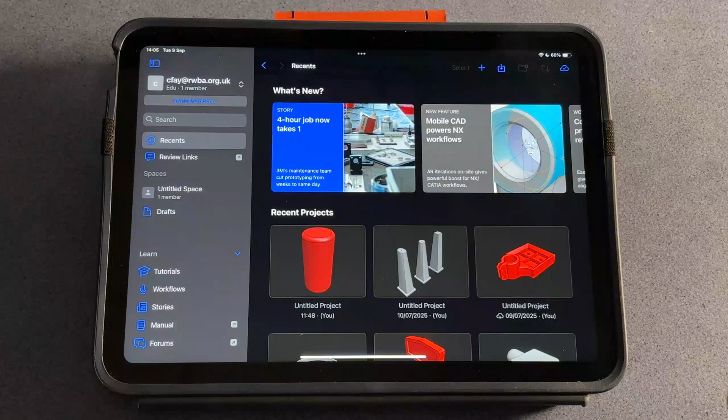As I've said in some of our previous videos, this isn't actually a beginner's course into Shapr3D. We really need you to look at the pizza cutter project or also the rubber stamp project, and that'll give you a good fundamental knowledge on how to use Shapr3D.

So speedily getting into it, we've opened up Shapr3D on our iPad, and I'm just going to hit a new file and it'll bring up a brand new workspace. I've got the OCR engineering drawing here, so I know all the measurements for all the correct parts, and I'm just going to basically start scribing that into the program.

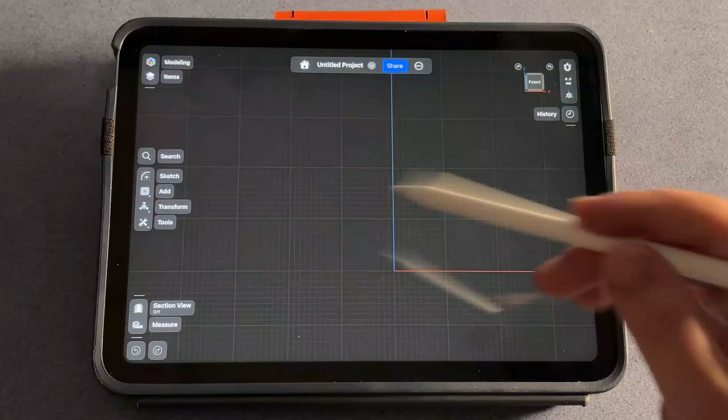Instead of looking down on the piece like I normally would from a bird's eye view, this time I'm actually going to do a side profile. So I'm going to go and select the front view, bring it down here. I'm going to start annotating the lines. I'm only going to be doing half the profile of this piece, so some of the measurements I'll be dividing by 2, but it'll all make sense when it's finally created.

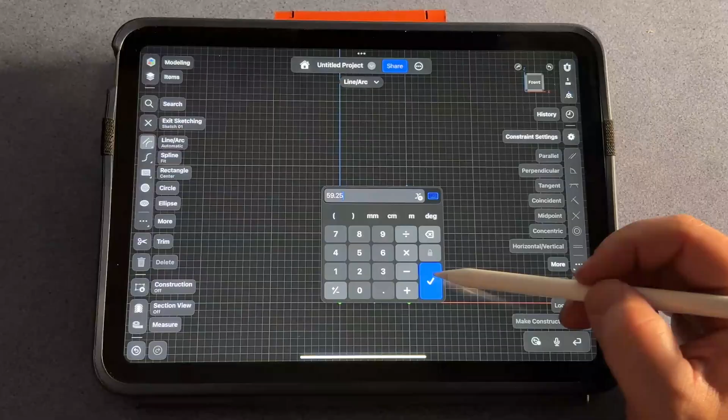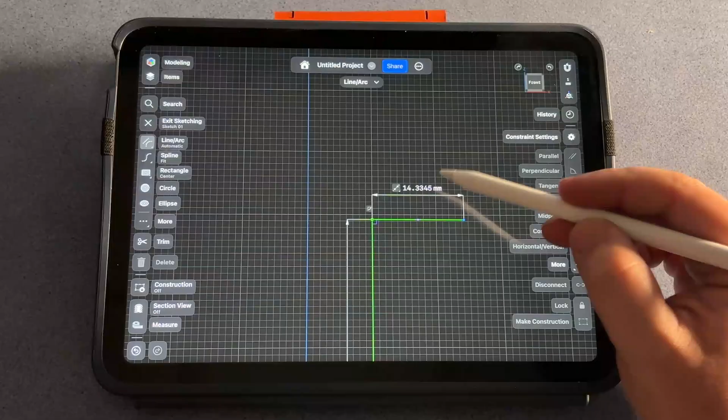So I'm going to hit sketch and my lines. So first of all, let's do the bottom 10 millimeters, so from the middle there, out, select that and 10. Okay, that line then would go up to 59.25, so 59.25, brilliant. Okay, next one, we need to come out, it'll work out to be 9 millimeters. So I'm just gonna type it in this way, that's it.

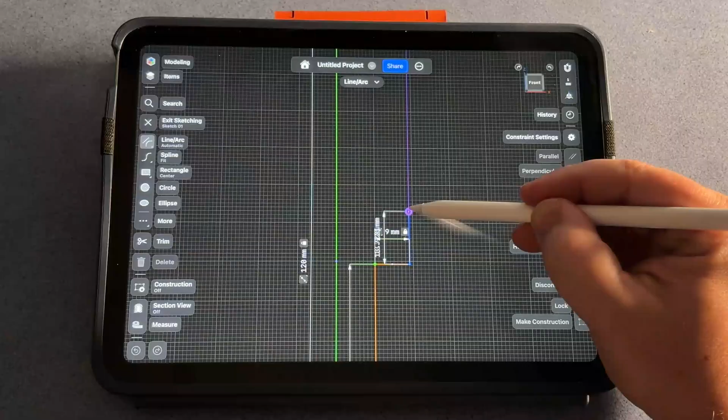And in total, the whole piece is 120 millimeters. So what I'm going to do for this one is I'm actually going to go back down to the start line and draw up a line, 120. And now I've actually got a line there, which is the length of the piece. There's 2 more little lines to put in. One is a 20 mil line in this direction here, 20 mil. And then I join those 2 up.

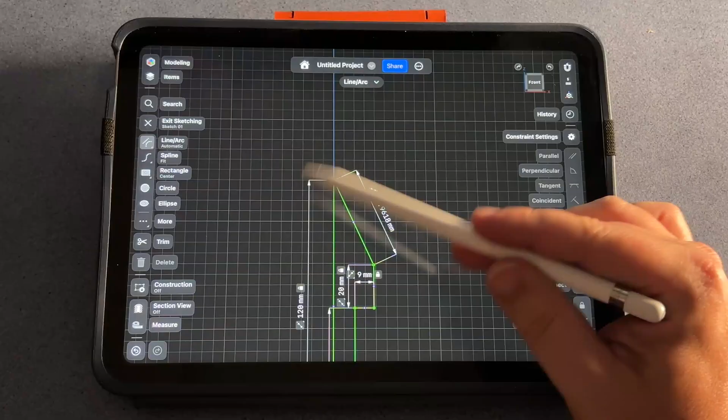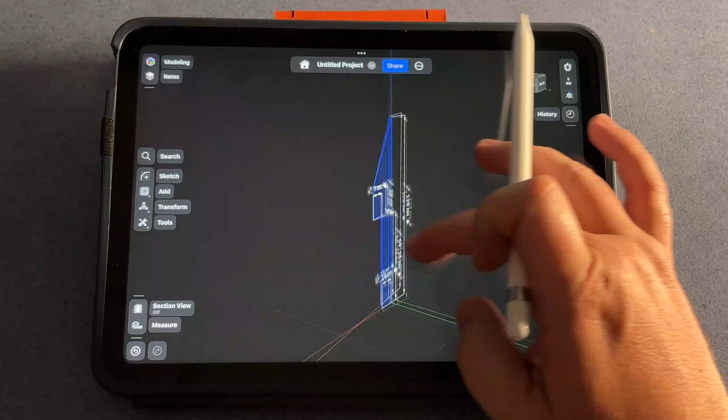And I should have an angle between those 2 lines of 25 degrees, because the full top radius would be 50 degrees. So if I click these 2 lines, it's saying it's almost like 1/1000th of a millimeter off. So I'm just going to put 25 in there, which I'm happy with. Exit sketching. And you should be able to see I've got a nice shape there, the side profile of half of our Plumb Bob.

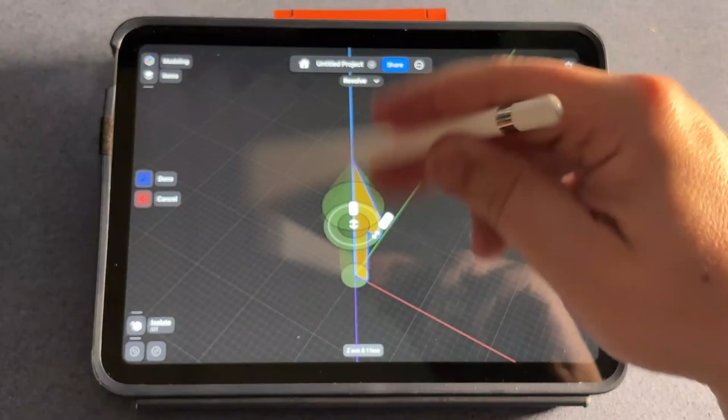So to actually create the 3D form of this Plumb Bob, I'm going to revolve that one surface 360 degrees on the vertical axis that we have here. So the way we do it, we would select the surface we've just made. We would find our option of revolve. And then select the shape and then select the axis. And what it's going to do is do a whole revolution of 360 degrees around that axis. If we hit done, you'll see it's now created that lovely 3D profile that we need.

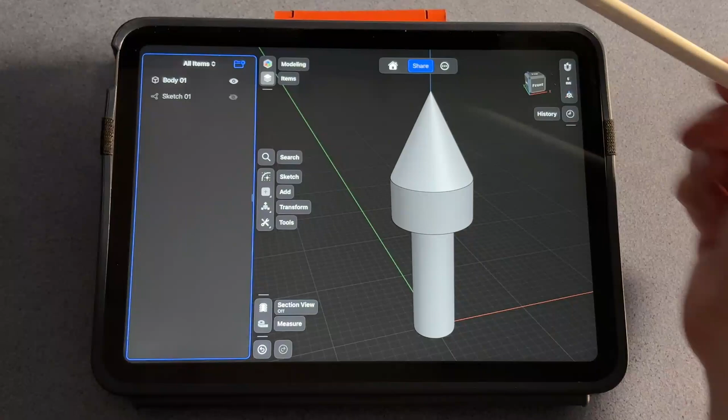I personally like to work a little bit cleaner in Shapr3D, so a lot of these measurements are associated with the drawing that you just did. So if you go to items and just hide the sketch that we did, it will hide all the details of those measurements and just show you that body that we've created.

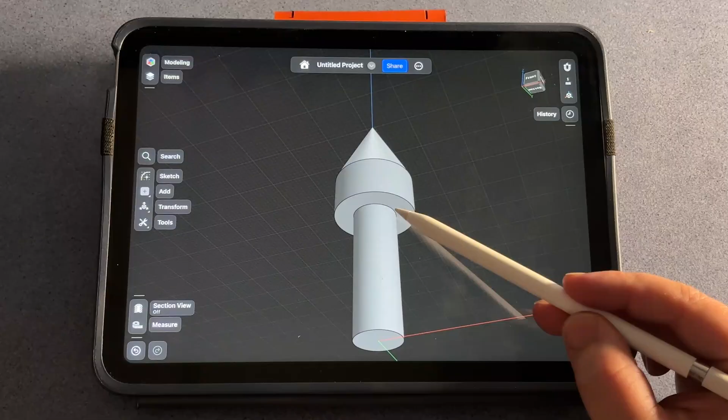There's just a couple more bits we need to add, and it's a little radius on this inside edge, a radius on this outside edge just here, and a radius on this bottom edge. So nice and easily, like we've done before in previous projects, select it, drag it out. It's saying it's a radius of 1 millimeter there, which is correct for that one.

I'm going to come up here, select the inside edge. That one's 2 millimeters, so 2 millimeters, perfect. And then it's the same with this outside edge just here, but I'm just going to make sure that's just selected, and 2, perfect, and deselect.

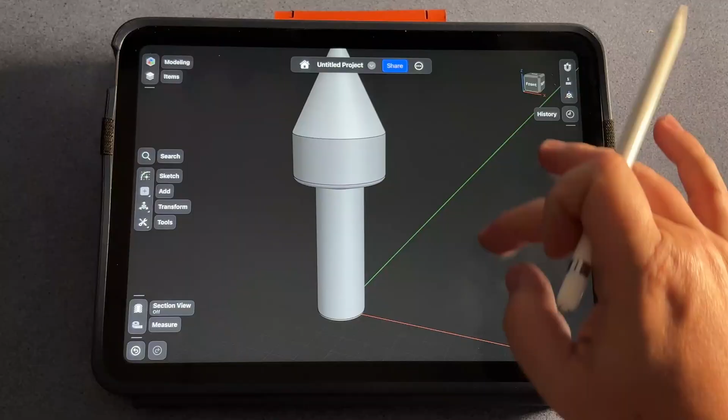Perfect, that's exactly what I needed for the outside form.

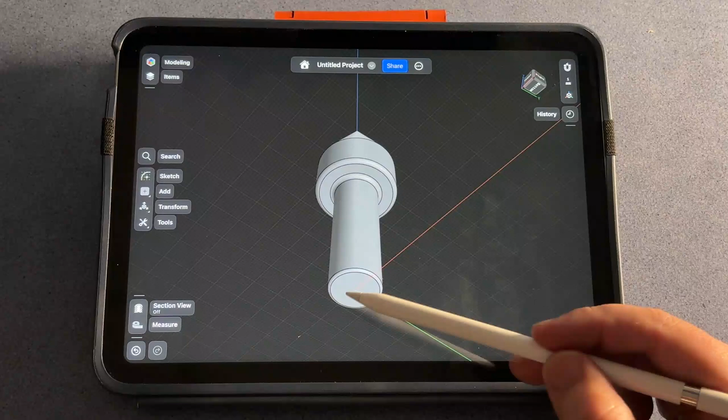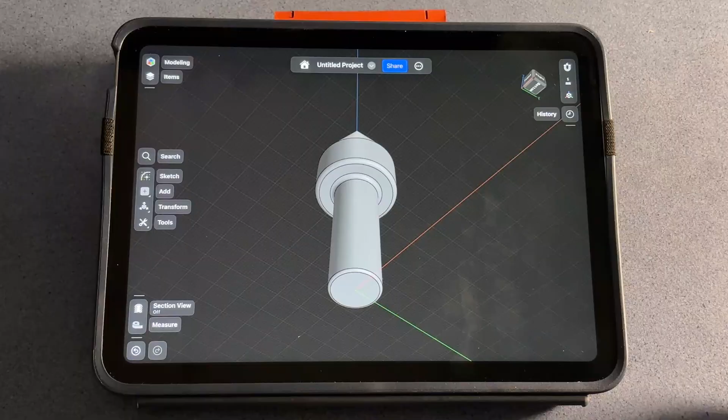So the next bit is actually one of the most difficult bits. In the end of this shaft, there is a metric 10mm threaded section which goes up into the piece for 20mm. With Shapr3D, there's not really an easy way of doing a threaded surface. You actually have to do this quite manually in quite granular detail. So I'm going to show you how to create the threaded section in this piece, and I'll try to explain as we go along some of the measurements, etc., and why we do it.

So as I've finished with this piece just for now, I'm just going to move it out of the way. I'm going to double click on the body and just drag it over to the side, keep it out of the way. I know I can hide it, but I'd rather just see it and it just be there. So I'm going to hit deselect.

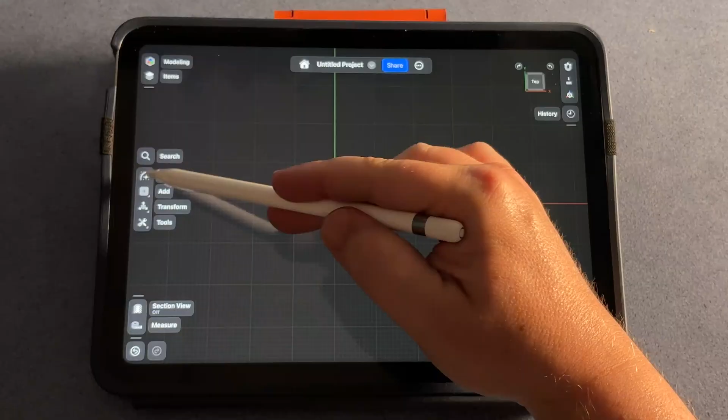We're going to start now drawing this threaded section. So the first bit, I'm going to go to the top view, and I basically want to do a circle, and I'm going to bring it over. I'm looking for an 8.8mm hole. Circle right there, and then I can extrude that.

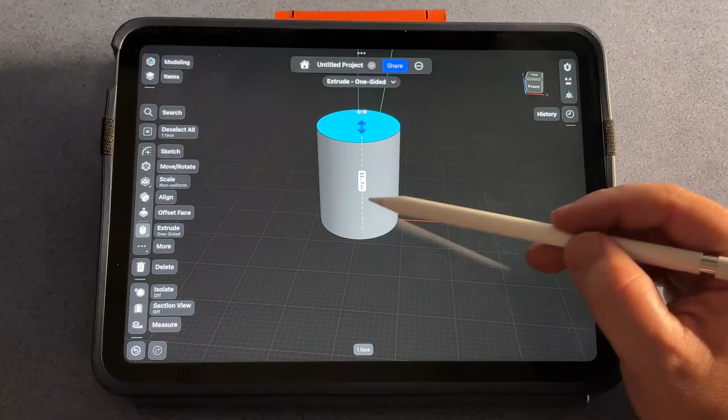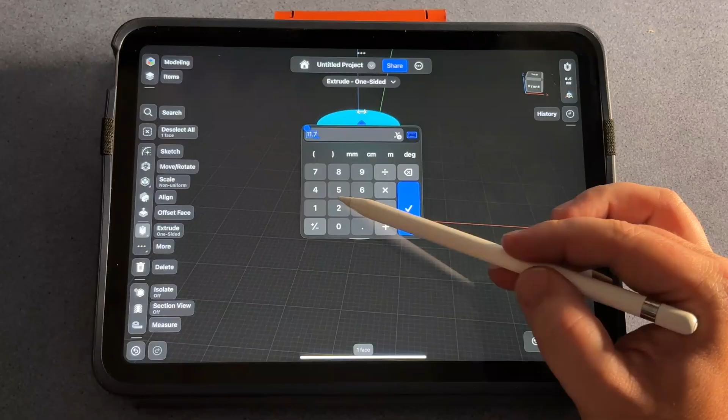The length of the hole that's going to be inside the piece is actually going to be 20mm, but I'm actually going to do 25 because we can trim the excess off in a minute, and I'll make sense of that in a little bit. So 25mm. And that's the length of the hole that we're going to create.

The next thing is we're going to create the thread, which is going to ride along the edge of this cylinder. We have to be quite specific with this because we're using a metric thread system. With an M10mm thread, we're looking at a pitch of 1.5mm, and that is basically one whole turn of the thread every 1.5mm. So I'm going to show you how to do that now.

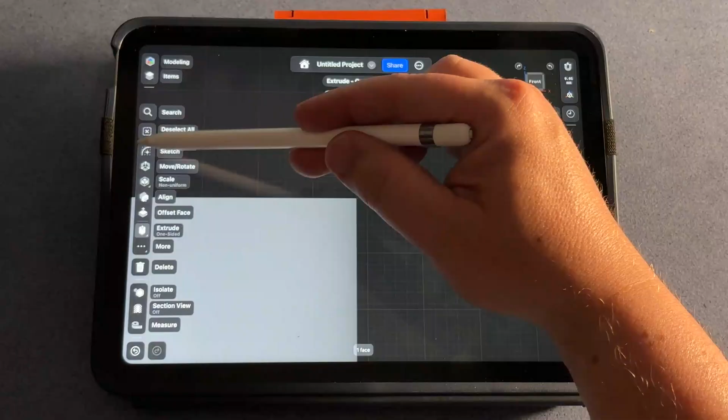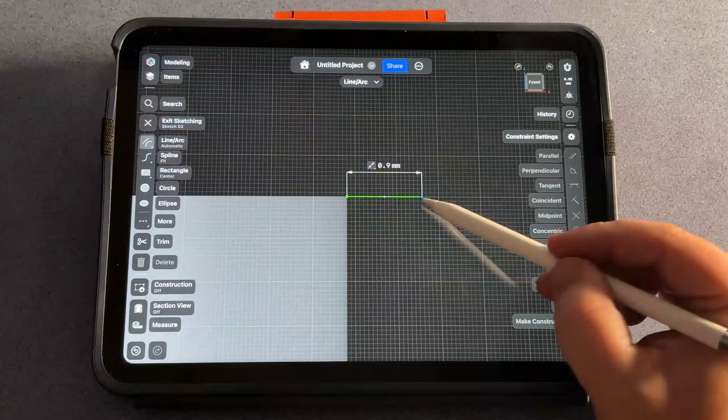So I'm going to go back to front mode, and I'm going to go to the top corner of our piece. I'm going to basically draw a triangle, which is going to be a profile of the thread. The best way of working this out is I know that I need to have a line that is going to be 0.9mm, because that's actually going to be the measurement of the thread. So 0.9, and then I'm going to draw two lines off of this to basically create the triangle of the thread, and I want that thread to actually be an exact measurement of 60 degrees between the two.

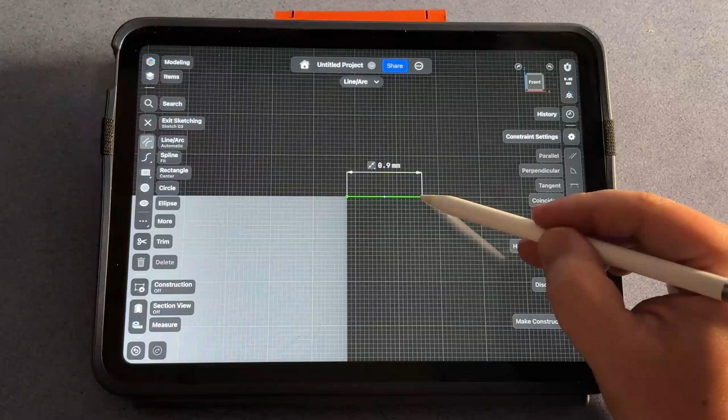So I'm going to draw a line first, draw it down, and then I'm going to select the two, and then I'm going to create half 60 is 30, I'm going to go 30, perfect. So I know this is this half, and then if I do a line over here, join it with that one, and the two measurements between there is going to be 30 as well.

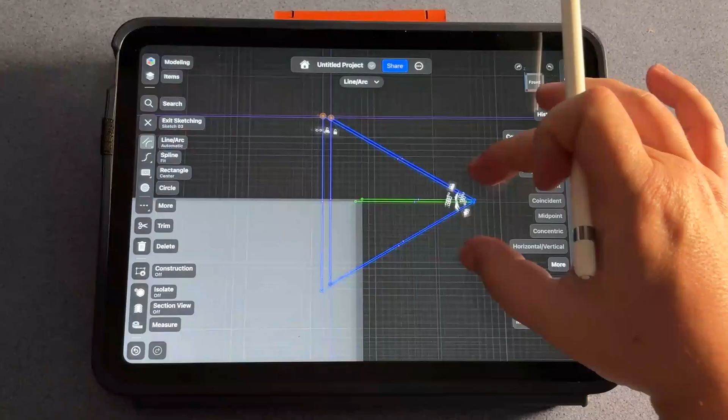All I really want is to make sure that those two lines are joined up as well, so I'm just going to do a line in between those two. Helps if I had them joined, there we go. And that is the profile of the threaded section. I'm going to show you by using the revolve option again - we're going to make a thread all the way around here.

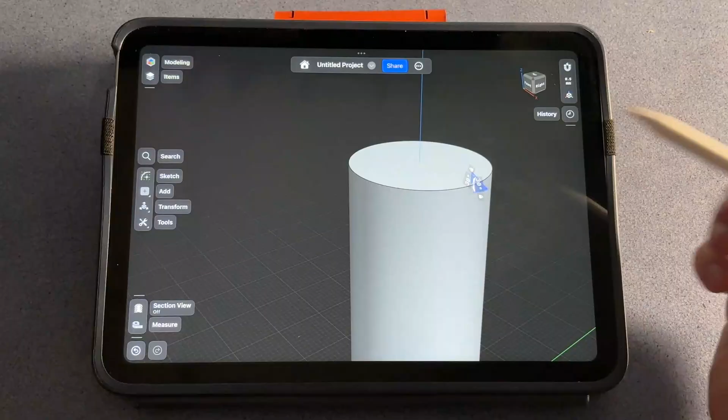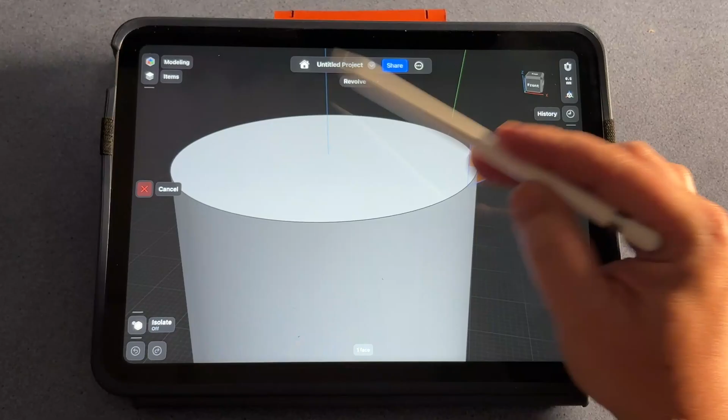What I'm going to do is select the triangle that we've just made, and then I'm going to find that revolve tool again, and we're also going to do it around that middle point. You can see it's basically drawn that thread as a single ring along the top. We need to change that. So at the moment where the depth of the piece is 0mm, we're going to go all the way down to -25, because that's the length of the piece. You can see now that single thread is only rotating once all the way through the length of 25mm, and that wouldn't be a very good thread for what we need.

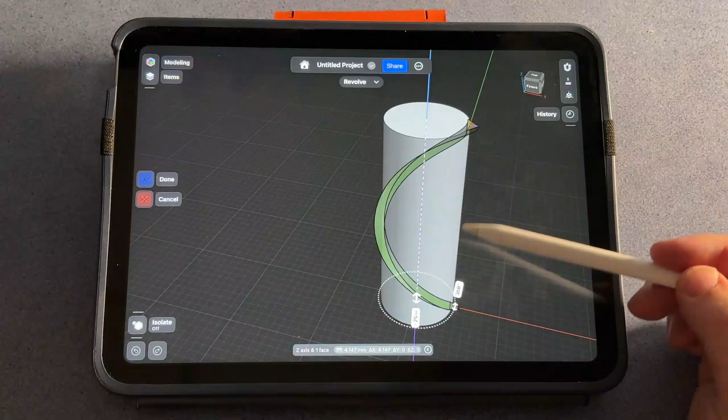So we know that for the thread that we're looking for, there'll be a whole revolution every 1.5mm. So I've done some quick maths with regards to the measurement that we need of how many rotations we do like this, and actually we would need it to be a figure of 13,500 degrees.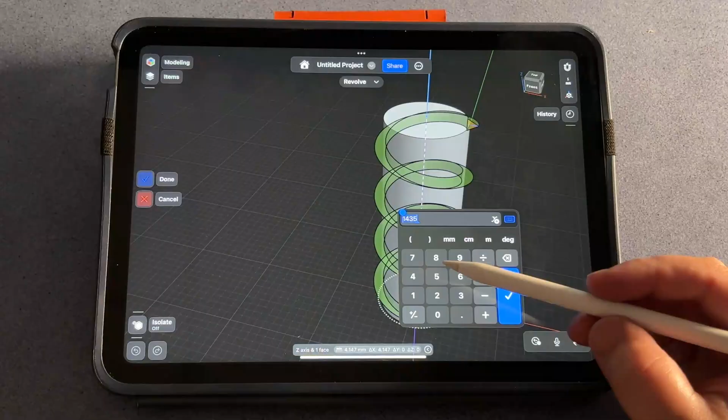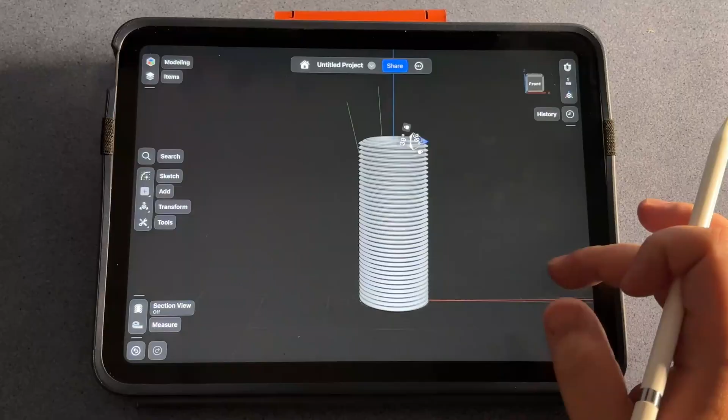Okay, and now you can see it's revolved around the piece in an accurate way. I'm just going to hit done so we don't lose that. And you can see that fundamentally looks like any screw or bolt thread, and we know we've pretty much matched an M10 thread pattern there.

Like I said before, I like to just remove the drawing of the triangle that we did. Well, more hide it than remove it, so I'm going to go to the hide for that sketch. And at the moment, the inside core that we created is a separate body to this outside. So what we're going to do is union both of them.

So what we can either do is go down here and select union and select that top column that we created and then the thread. And then if you hit done, that is now a single body, which we can use a lot more easily.

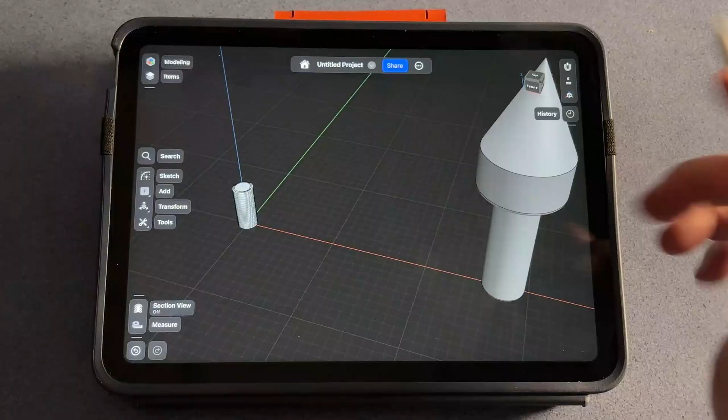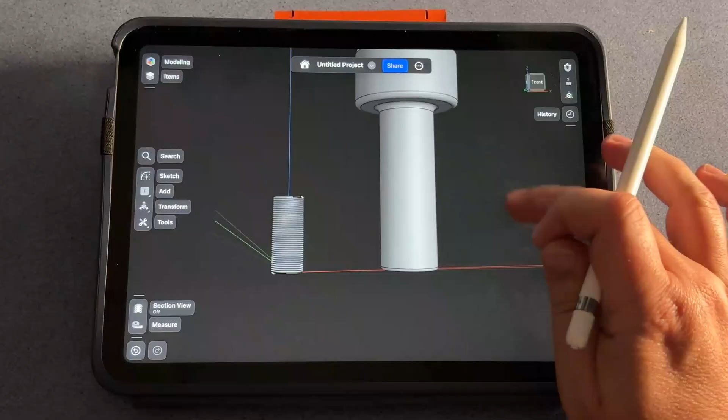Now this shape is ready to subtract from the piece that we made earlier on. So if I just bring this back over, just a little bit closer. So there's a nice way where we can align this piece right to the end of the piece over here, because we want to subtract it from this end.

So the best way of doing it is we're going to select the end just here and go align. And you can see it's selected the very top part. So now if I select the bottom middle of this piece, it's going to place it directly against that surface, dead center as well, which is exactly what we want. So I'm going to hit done.

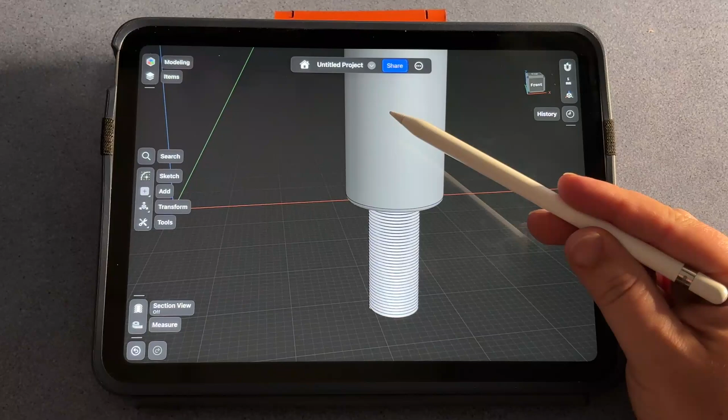So now we need to get this threaded part in a position exactly to where it needs to be in this body here. So I said that the hole depth should be 20 millimeters. And I know at the moment that our threaded part doesn't actually go into this body yet.

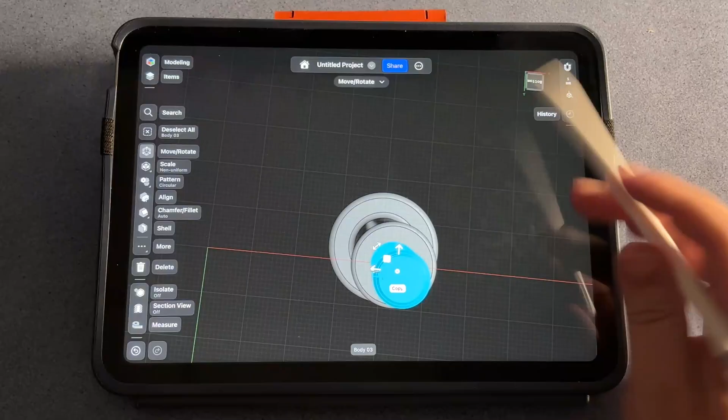So we can actually move it really accurately 20 millimeters up in that axis, and it should go directly into the place we need. So I've selected it all, and then I'm just going to move it up, and here I'm going to select 20 millimeters.

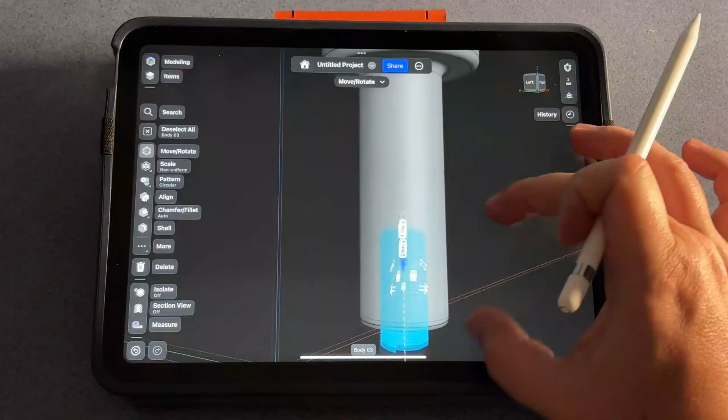And now, if you can see there, it's moved it up into that body, and there's 5 millimeters extra just sticking out the end there. So I'm just going to deselect that.

And now it's just the simple bit of subtracting this shape from this shape. So what I would do is I would select the main body of the plumb bob, and then find the subtract tool, which is down here.

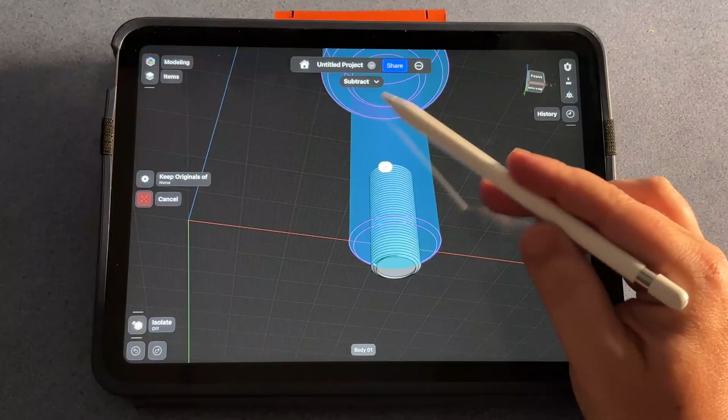Because I already pre-selected it, it's saying that's the bit to keep, so it's got a plus there, and we just now need to tap once on the bit that we want to subtract, and we know that it's that threaded section. Hit OK.

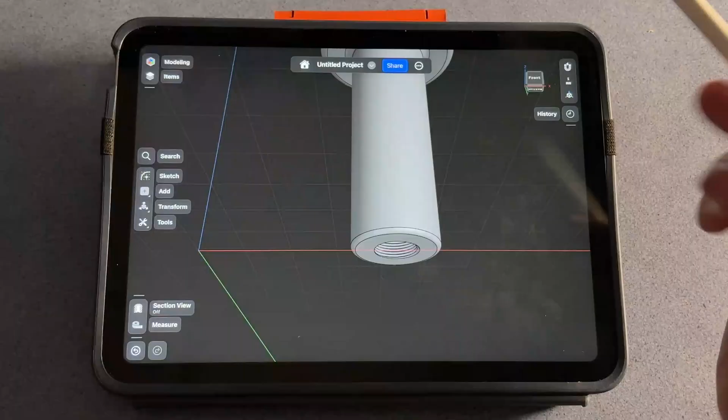And now if we look into the end, you'll see there's a really nice M10 pitch of 1.5 threaded hole, internally threaded in there, all the way down to the length. And now that matches the engineering drawing that we had perfectly.

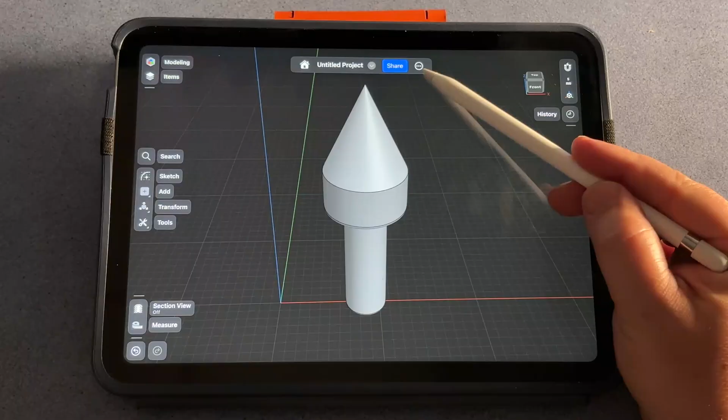And now all we need to do is export it so we can take it into the slicer software. So to simply export this in the right file that we need, there's 3 little dots in a circle at the top here, and you go down to export to, and then from there you hit export.

And there's 2 main file types that I like to save to bring them into Bambu Studio. There's an STL file or a 3MF file. So for this time, I'm just going to use an STL.

I make sure the resolution's set to high, and then just export. You save it with a name, something practical. So you would write it down here, put it into the right place that your teacher's asked you to save it to, and then simply hit save.

And then we can take that file onto the computer that has Bambu Studio and get it ready to slice up the 3D file ready for the 3D printer.

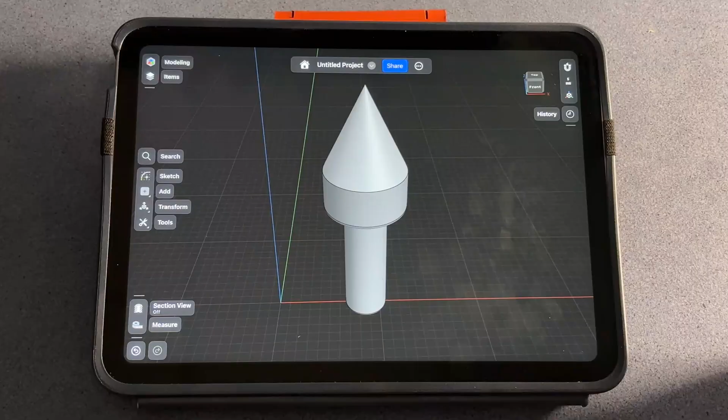So I've come over to the desktop PC that's running Bambu Studio. And like I said, this is a bit of software that will create a sliced file for the 3D printer to work from. And I'll try and explain as we go on what it's going to be doing.

So first things first, I'm going to hit this green button in the top which says create new project. And here you can actually see the build plate of the Bambu Lab A1 Mini.

So this is essentially the base of what we're printing onto. They come in a few different variations. I've set it to the smooth version, which doesn't leave a rough finish on the underside of a piece that's printed - it should be relatively smooth. We do have another one that has a texture. Sometimes that's actually a good thing because it gives better bed adhesion, so you won't have any 3D prints falling off during the print - it'll stay quite solid. But for what we're printing, this flat smooth one's absolutely fine.

You can also select here what type of filament you're using. We use PLA plastic, which is a derivative of cornstarch, and it's used a lot across the industry with regards to prototyping. There are other properties with other plastics, but this is the one we're going to use for now. You can also set the size of nozzle you're using - that's the hot end that the hot plastic gets extruded through. At the moment, that's standard at 0.4 mil. There are a lot of other settings you can use with regards to your design to achieve different things, but we'll talk through those in a minute.

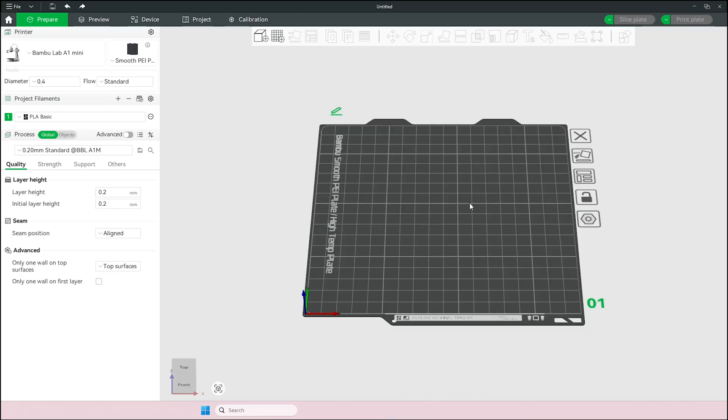So first things first, what I've got to do is bring in the Plumb Bob. So that file that we saved, I'm just going to bring it in and drop it on the bed. And there you can see the 3D render of the Plumb Bob just sitting on the bed like that.

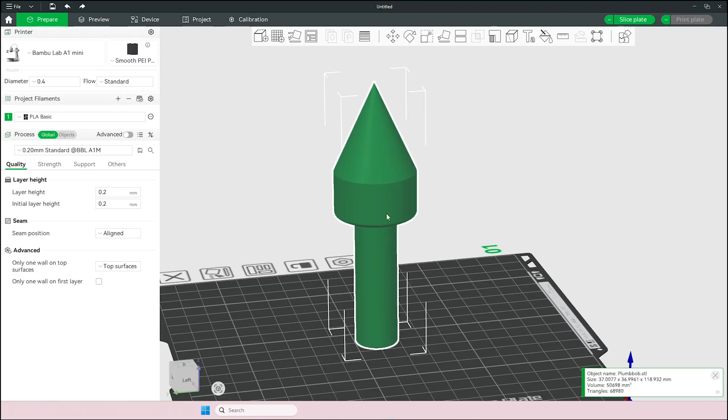This is actually the orientation in which I want to print it. If I had this turned upside down, it would be very hard to print this top surface nice and smooth inverted without lots of supports, which I'll try and explain again in a bit. But this is the best way of basically printing the Plumb Bob as we have it. So you can see at the bottom there, we've got the threads that'll be against the bed, and then the shaft comes all the way up to the head there.

So the best way to view a 3D printer is a bit like a glue gun on a computerized controller. Imagine a glue gun traveling around a set path, and after it's drawn a shape, it raises up a little bit and draws another over the top, then lets that cool, and carries on until you start building this 3D form. Obviously that's the crudest way to explain what a 3D printer is - it's doing it in very fine tolerances with temperatures and speeds and sizes being dialed in correctly to get a decent looking print.

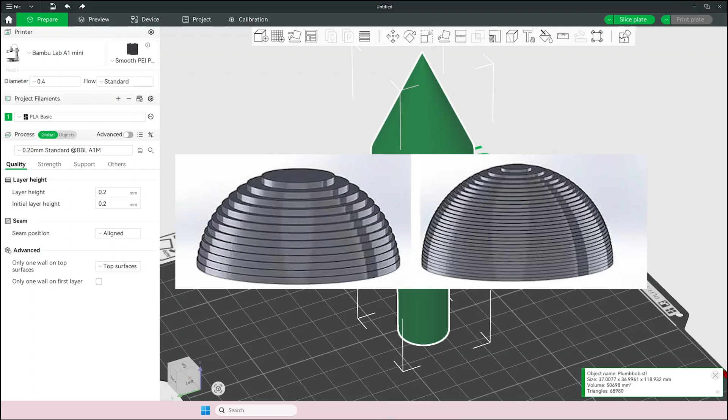The more layers you have in a print, the more time it's going to take, but also you're going to get a better resolution of print. If you had bigger distances between each of the layers, it would print quite quickly, but you'll notice a lack of quality there. So depending on whether you're doing a draft prototype or a finished article, that's where you would change around the layer height. Pretty much standard on this printer is a layer height of 0.2 millimeters, so it will do a layer every 0.2 millimeters.

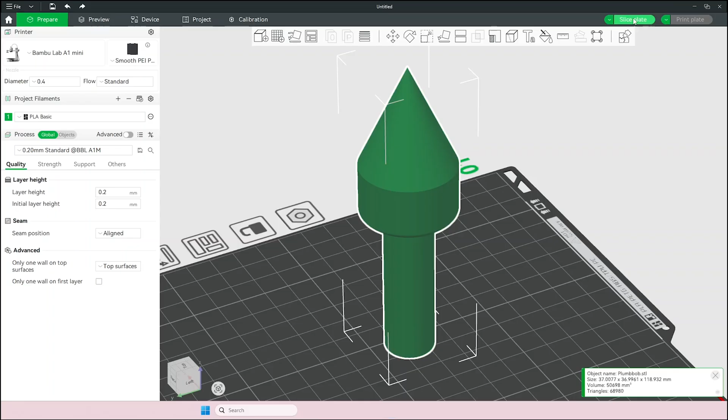So what I'm going to do is check that this is all set to standard, and I'm going to hit slice plate up here, and you'll see it convert this 3D shape into a sliced image. So this orange shape now is actually built up of lots and lots of individual layers, and it can now give us estimated times for how long it's going to print, and it also has a color key - you'll see this inside in a minute - of the different types of print.

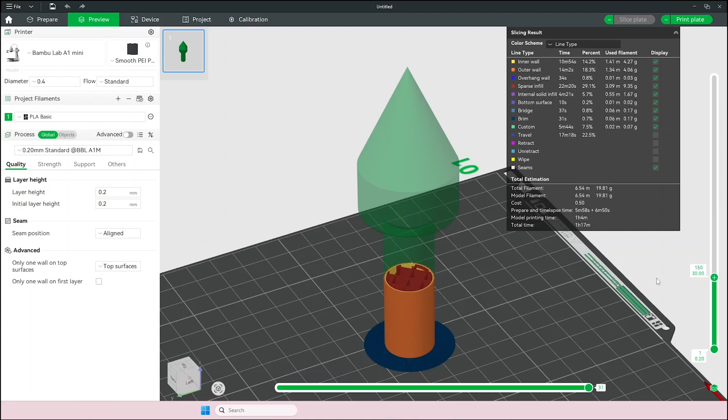So we never really print things as solid material - this is actually going to be hollow with a grid inside. And I'm going to show you that, because if I drag down on this bar here, and if you look at the top, you can start seeing every single line that creates this piece, and you can see the infill there. You can see it come down, and then you should be able to start seeing the threaded section that we created right up to that initial base layer, which is generally made to adhere to the bed.

If I bring it back up to the top, I should be able to tell you how many layers there are. It's 592 layers in total to make this plumb bob. So as you can imagine, the printer has to work quite hard to get even something this small created.

We talked about layers, how the image is broken up into lots of little layers. What's quite nice about this program creating the G-code to control the printer is you can actually add in pauses. So if you had something you needed to drop in, be it a magnet or a mechanical fastening, you could set a pause at a certain layer. It would bleep at you when it got to that layer, and then you'd insert what you needed and hit resume, and it would print the rest of the piece.

Generally that's all specific to what you're designing. Sometimes it can be counterweights, magnets, mechanical fixings, things like that. But it's quite handy that you're able to add a pause whenever you want, to allow you to do these things, which back in the day, early 3D printers wouldn't allow you to do.

This little dark blue section is called a brim, and it's automatically created because this will improve the adhesion to the bed for our piece. Because it's quite a tall piece and there's a lot of movement with the 3D printer as it's printing, this gives it more to grab onto, making it a lot more secure. You can change the size of these brims, and there are a few different versions it would create to add this support, but it's a handy thing that it adds automatically at this point.

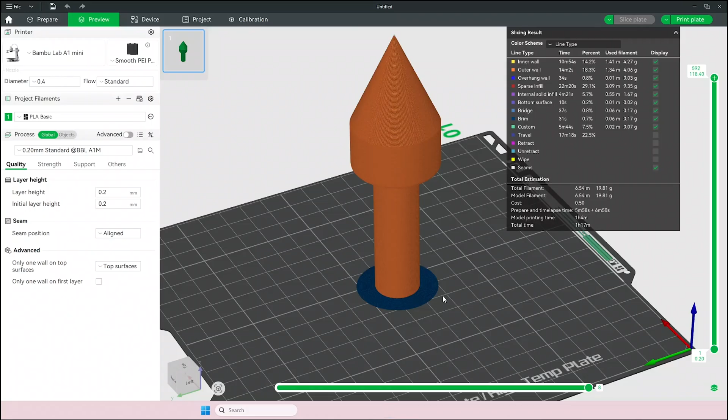Realistically, if we were to send this to print now, it would create a hell of a mess. The reason for that is this big overhang on the head part. When the 3D printer gets to the end of this shaft and starts to try and print this, there's nothing for that filament to lie on. It would just literally fall down, and you'd end up with a big plastic spaghetti mess everywhere on the bed. So in this case, you would use something called supports.

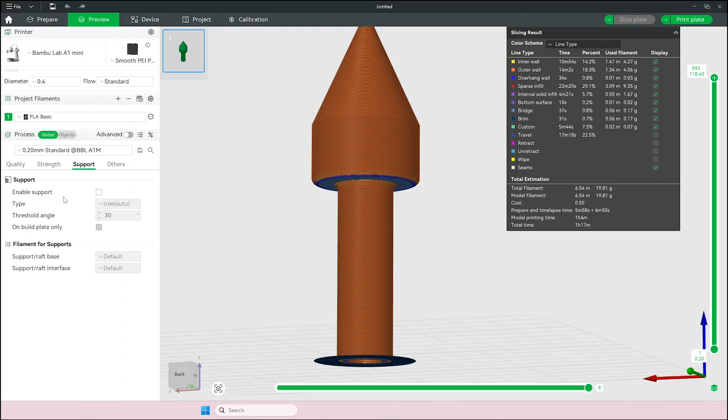Supports are over on this side - as you press that button, there's an enable support mode, and there are a few different supports you can use to create the structure to support that overhang. If I hit enable support now, and hit slice plate, now you can see that overhang is being supported by lots and lots of branches, and this really does look like a tree. So this is actually called a tree support.

It's a nice way to minimize support material, because all this will be wastage afterward, and it's slightly quicker than a traditional support, which I'll show you as well. So I'm going to turn it onto support, and as you can see, all the way around there it's been supported by those branches now, which is what we need.

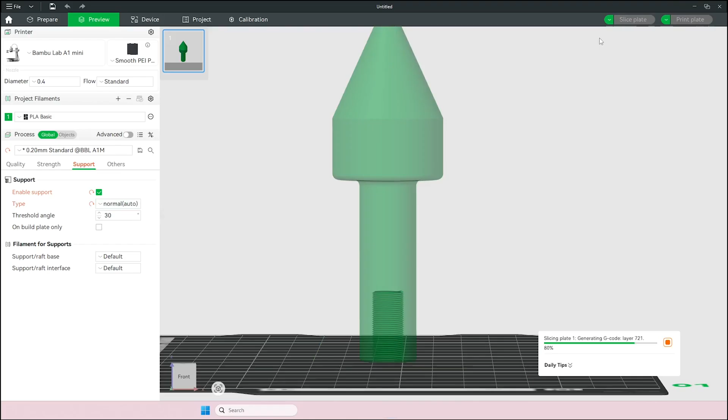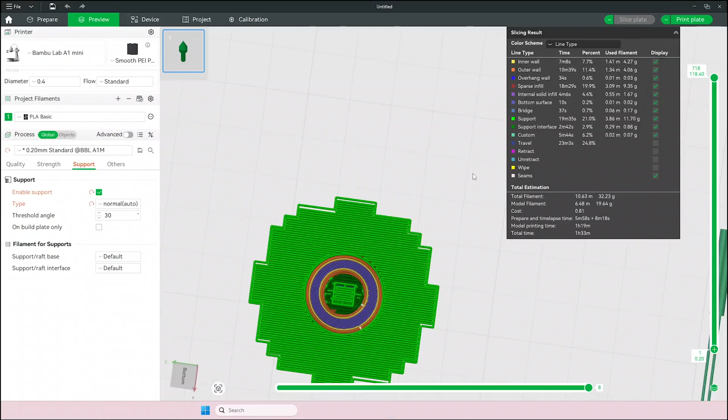If I now change the support mode to normal and slice it again - the way this support material works is it does a big hefty block. If I bring the top down there, you can see it's a fanned, grill-like structure, and it would go all the way up the side of the piece right up to where it needs the overhang support. As you can see, it's quite big, so you do use a lot of material.

Because we're obviously looking after the environment as much as possible, I would select tree for this case. But it can depend on what you're printing - sometimes tree supports won't be exactly what you need and it might not work. But for this, it's quite a simple overhang, and as you can see there, it looks like it's being supported all the way around quite nicely.

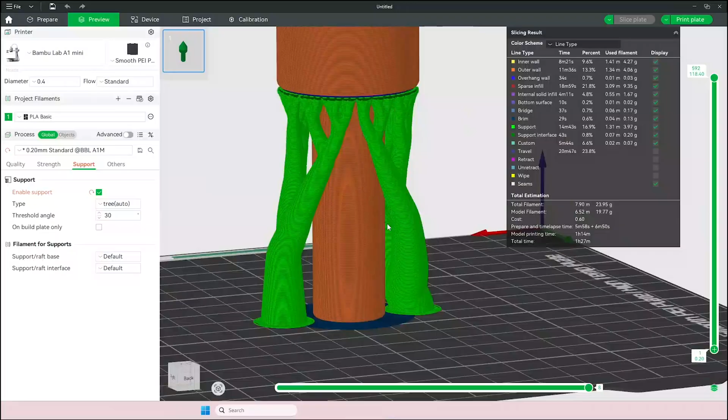The downside of having an automatic support like this is if I actually turn to the underside, you can see there's a big green support in this middle section where all our threading is. So if I move it down, see all that threading and the top of that void has been supported. This can be a bit of a pain to remove because we obviously want this nice hole for a bolt or another piece to be screwed into.

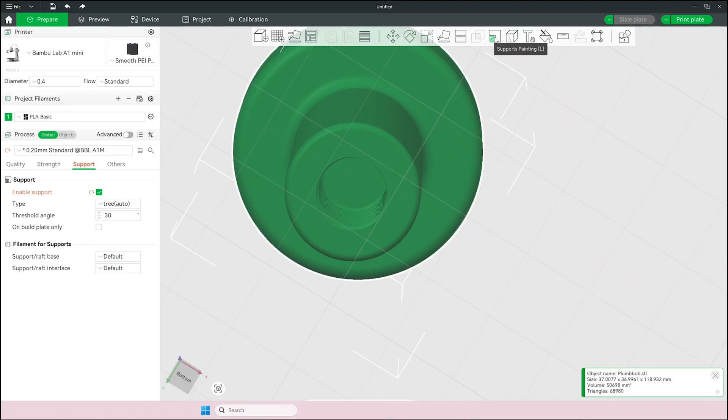So we can try and select for this area not to have any supports in. So if I go back to our prepare view and bring it down just like that, there's a tool here called supports painting. And if you left click on an overhang like this, it will turn blue, and that is an area that you're telling that no matter what, you want supports there. But if I go over to this side and actually right click, it goes red, and you're actually telling that you don't want any supports in that area.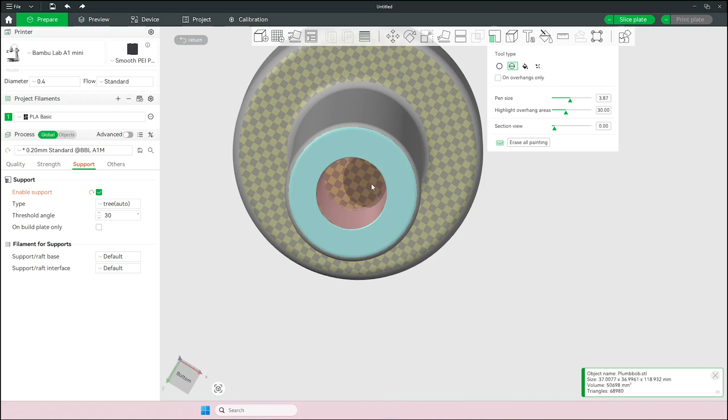Okay, so what I'm going to do is inside this section here, I want to paint using the sphere tool red, because we don't want any area in here to have any supports. Sometimes you can use the paint bucket fill, but I have found because we've got a thread section going on there, it can get a little bit messy. Just remember to use the right hand button on your mouse for red, because otherwise it will go blue like that, which will add a support.

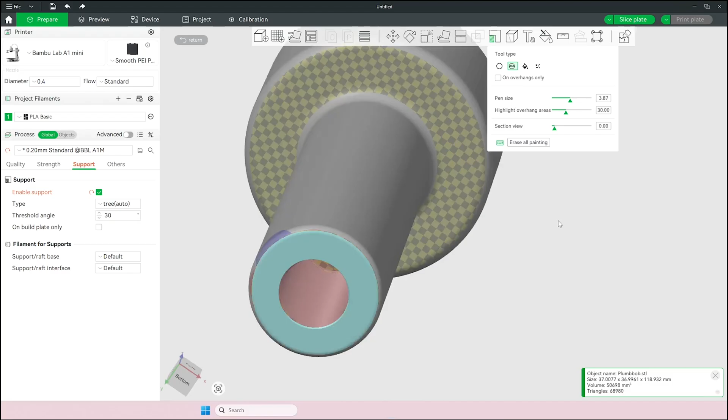So just really carefully making sure you've got everything in there, because it can be a bit finicky. I think it's just because we have got quite a finicky little thread going on there that sometimes it can throw up some problems. So I've painted all inside that area red. So now if I slice the plate, and it's just loading up, brilliant.

So now you can see that inside that threaded section, we've got no supports because we don't really need it for that part. So when this finishes printing, we are able to take it off, break off the tree supports around this outside, and we won't have to worry about any of the inside threads being affected by these supports.

So just quickly summarizing some of the basic tools that we have on the left-hand side here. If I go to quality, this is where you can change the layer height. So I said a standard for this would be 0.2, and you can change that smaller or larger depending on what the 3D printer that you own or a business owns is capable of.

A seam is something, if you see this big white line, basically every time the hot end that's squirting the plastic out comes up a level and starts again, every start point and finish point will create a little tiny blob, barely noticeable, but if it's in the same place all the time, you'll see quite a clear seam. For this project, it isn't much of an issue. Aesthetically, it isn't going to change anything. That's absolutely fine. But that's set to aligned, so it's automatically finding a way that we can align it.

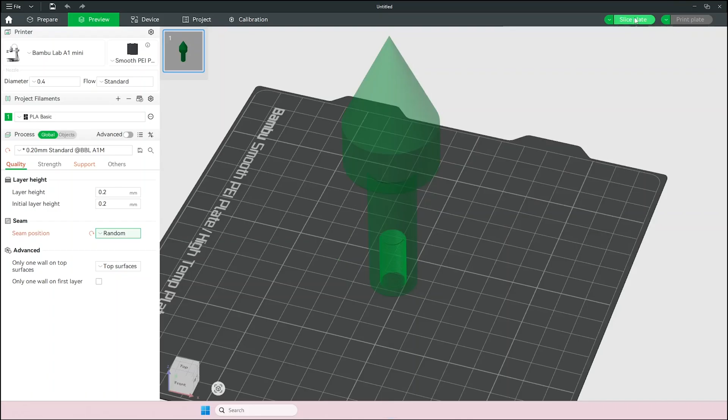You can set that to say random. So if I hit random and hit slice plate now, you'll see that those white little dots are actually spread all around the piece now from all directions. That might be something that you need, but actually when you have a nice smooth surface, you do actually see these little pips of seam that come up and down the length there. So for this, not necessarily something we need.

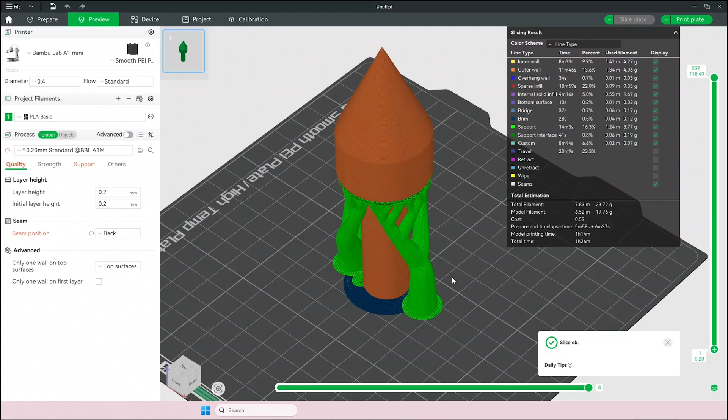You can have it all aligned to the back. It's just handy to have a bit of a play. So this is in a straight line all the way from bottom to top of the piece. I'm quite happy with that, so I'm going to leave that as it is.

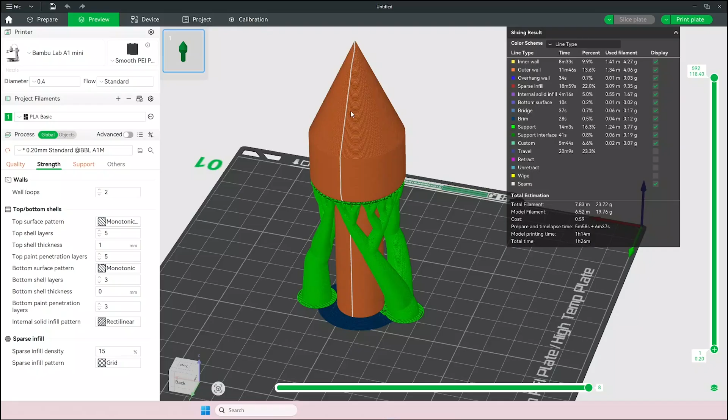When you come over to the strength tab, this is where you can add stability to a piece. And once again, it all depends what you're printing and where you want the strength to be on a piece. But generally, the outer shell on the outside, you can select how many lines of filament thick it is, how many wall loops. So at the moment, if I come down here, you can see that the outside wall is basically made up of two lines. There's the yellow line here and this outside orange line.

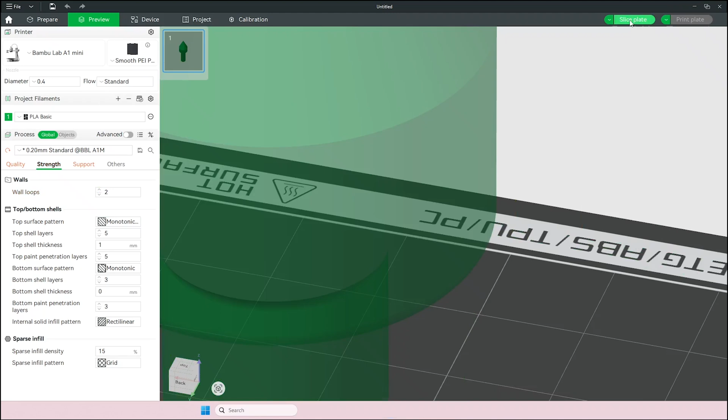If I wanted to make this a bit more sturdy on the outside edge, say if I wanted to go to 4 loops, I'll select 4, and then slice the plate. And now you can see that edge is made up of 4 paths of filament. Obviously, the more you have, the longer it'll take to print, but it's that quality versus speed discussion that you're having. It all depends what you're making and what you need it for. With regards to a prototype, more of a visual prototype, 2 layers would be absolutely fine.

The red section that you can see in the middle part, that's the fill. I'm just going to close this down so we can see it a little bit better.

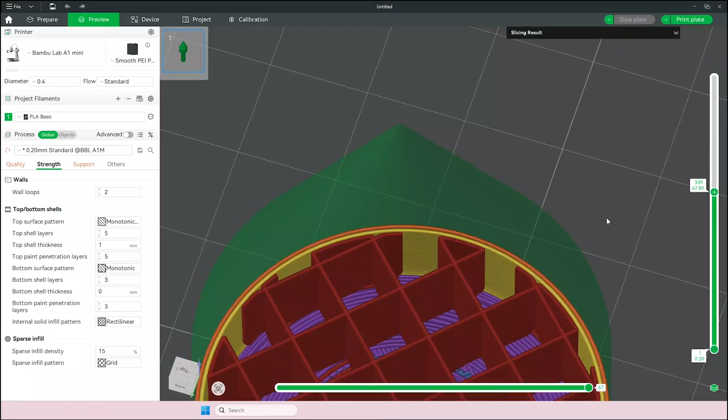This is the infill pattern. This currently is set to a grid, so it is literally, other than the trees there, if I rotate ever so slightly so we can see this, it's just like a boxed grid that goes from top to bottom. This gives stability in sort of the left and right and up and down that way, but it isn't giving complete stability along the other axis.

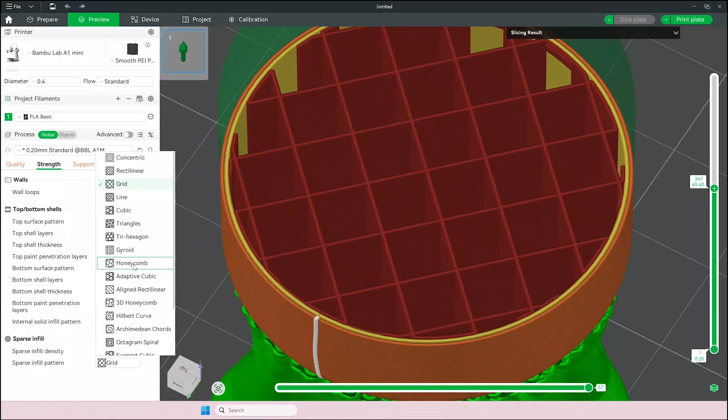So there's a few different patterns that you can have inside, like honeycombs. Say if I select honeycomb just to show you what it's like. So you can see now that that's a honeycomb section all the way through. But still, that's giving you stability in a particular axis, but not necessarily the other.

So for a print like this, I like to use cubic. So if I show you, cubic gives you a support of a grid, but it also splays out as it goes along. So it's actually building like a nice 3D grid inside, and I find it gives more support on all axes that way. But like I said, it depends what you're printing and what your needs are to what kind of infill you will use. And you can change the density of it.

So say this is quite an open density set to 15%, but say if I went to something like 50% and then hit slice plate, it's going to do a lot more printing, but can you see it's a nice finer pattern inside there? That would make it really strong. You could go to 100%, which would make it pretty much a solid piece of material, but you'll be using a lot of filament and it might be excessive in time as well. It would take days to print.

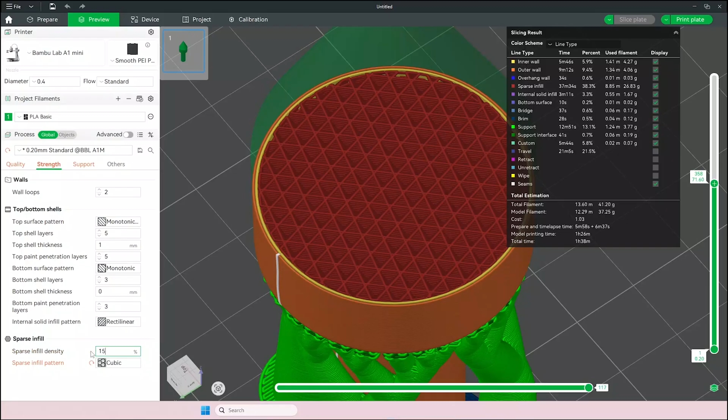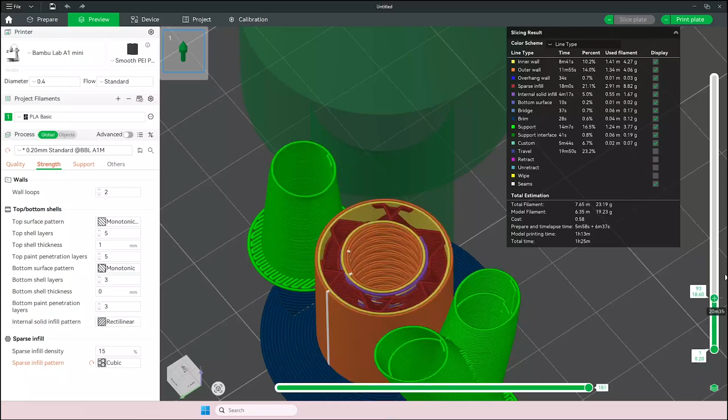So where we were, let's just have a look, 15% would be pretty good for what we're looking for here. It only uses the infill where it needs to, otherwise it'll be an outside wall. And you can also set the thickness of the first initial layers at the bottom, so you could actually have a thicker wall on the base, and also the top as well. But as we've got a nice big cone on the top, we won't necessarily need any extra support on the top surface.

We've already looked at supports, so I'm just going to hit others on this section. And there's different variations. You can change how many skirt loops there are, and that bottom blue section is what we're calling a brim or a skirt. And there's a few different versions like rafts that you can do, and they all do different things for different purposes.

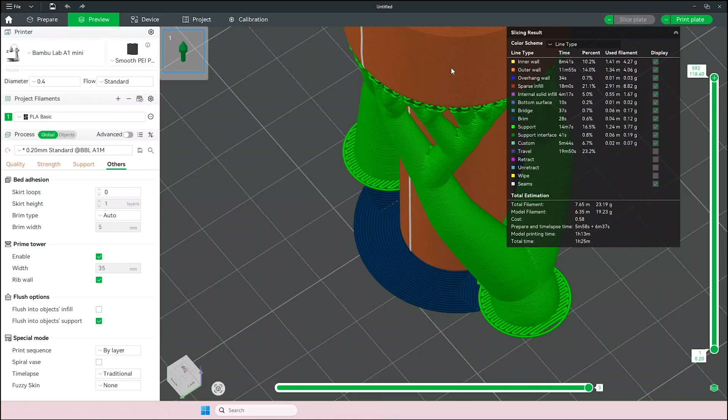You can change how the wall looks as well. So this is a nice flat smooth section, but you can actually do random movements within it to make it what they call fuzzy and things like that. But we don't really need to touch any of these things for simple prototypes that we're doing now. So just to double check, we know that we've got no supports down in that center section. I'm quite happy with all the settings that we've set for this.

So it's just a case of exporting it to the micro SD card and taking it to the 3D printer. So the way you would do that is just hit this top section up here, and you can change it to export plate sliced file. So this plate here, and then you would just click it. You would save the file, put it onto your micro SD card, and then you could take it to the printer, and as long as the printer is all set up ready to go, it'd be all good to print.

So I hope that helps. You can get a lot more granular in this slicing software. There's a lot more things that you can tweak and get into. But with the Bambu Lab printers, they tend to just work as is really well, especially for the prototyping we're trying to do at the school.